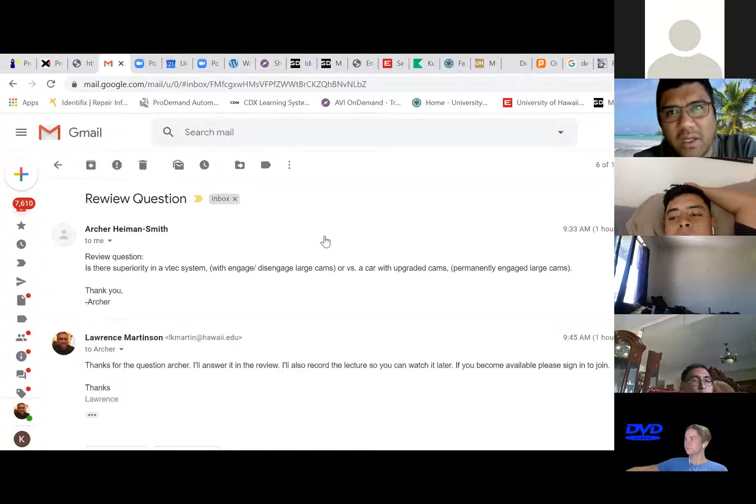So the discussion we can have is: is it better? The only way I could see that it's better is that it still gives you fuel economy. However, if you wanted power all the time to go as fast as possible, I don't think VTEC is the way to go, only because it's got so many moving components. So I hope that answers Archer's question — can you guys think of anything else that I might have missed?

I think the other thing it does at low RPMs is make a smoother engine. So you have the torque and power at high RPM, but you also have a smoother, more fuel efficient engine at low RPM. Because if you have a radical cam permanently in your car, when you're idling it's almost going to sound like it's going to die out if you don't get some RPMs up. Right, so it is a smoother engine. It's about finding the balance between high performance or mid-range performance, since most VTECs don't come stock at the high performance design, while also getting fuel economy, good vacuum, and a smooth running engine.

Okay, Jason, your turn.

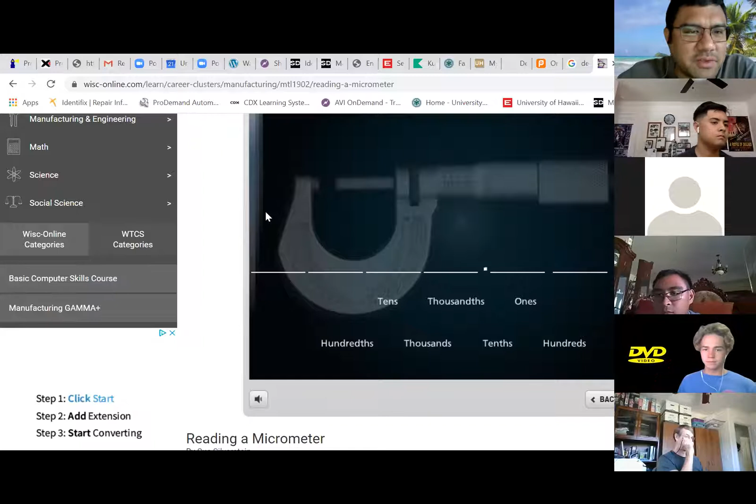Okay, let's drag these out so you guys all have a good understanding of where the places go. So where does tens go? Why don't we start off like this? Jason, I'll go down the list just like I did with the review. Jason, where do the tens go?

The tens? Yep, two places to the... just right above it, right here. Okay, where do thousandths go?

JT? JT? Okay, I'll skip him. Roy, oh JT, where do thousandths go? Space to the right. To the right of the decimal, two spaces, right here, to the right. Yeah, JT said 2 spaces to the right of the decimal point.

Okay, sorry, I couldn't hear. 1, 2, you sure, right here? Yep. It won't let me drop it there, so it's got to be wrong. The next one over, I'm sorry, say that again. All the way to the right? All the way to the right.

Okay, good. Okay Roy, where do ones go? Right by the tens, to the right hand side. Yeah, okay.

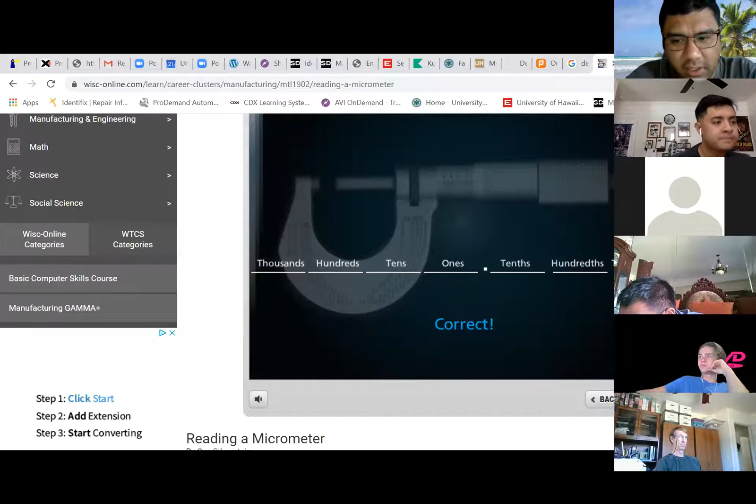Okay, let's move forward. Now that you guys are reading a micrometer, it can be compared to counting money.

So if we look down here at this scale, these whole numbers from 0 to 1, 1 to 2, 2 to 3, those are considered dollars. And in between those whole marks are considered quarters, so 4 quarters make up a dollar. And on the very end here, on the thimble, we have pennies. You guys will see how this lines up in a minute. Just remember: quarters, dollars, pennies. We're going to count that in that order, as if you were counting change.

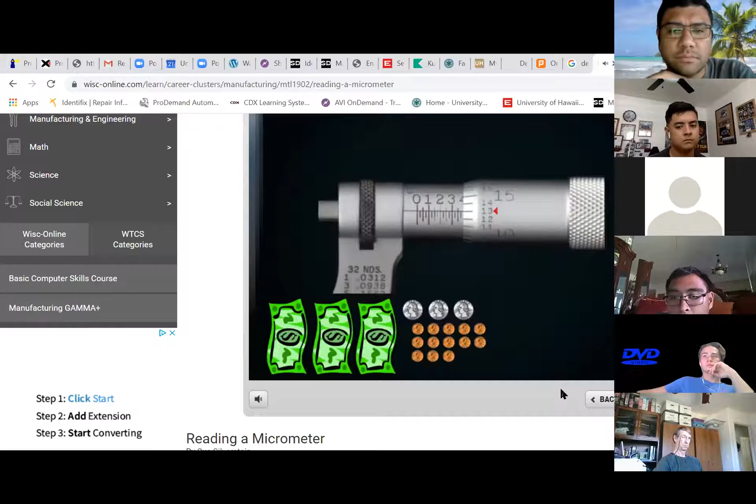When you add all of the coins and cash together, you have a total of $3.88. If you remove the dollar sign and move the decimal point one place to the left, your measurement is 388 thousandths of an inch.

Okay, you guys see the theory going on here? I know we're going to repeat this several times, because if I just stopped here, it most likely won't get burned into your memory the same way as if we repeat this over and over. And there's some other parts of this theory that has to be covered too.

For example, can you see the 4 here? So we have 1, 2, 3, 4. Where can you see that fourth dollar? Well, you can see the fourth number here, but you can't actually see that line, so we cannot count that next dollar up. However, if you were on 0 on the thimble side here, you could count it if it was up to the 4 line.

And really where this is going to come down to is calibrating the tool first. On Electude, the assignments I gave you include a chapter just for engine tooling, and I think it would be important for you guys to go through it. It covers the vernier caliper, the micrometer, bore gauge, and some other tools. I think with that material alone, you guys should come up with some interesting questions.

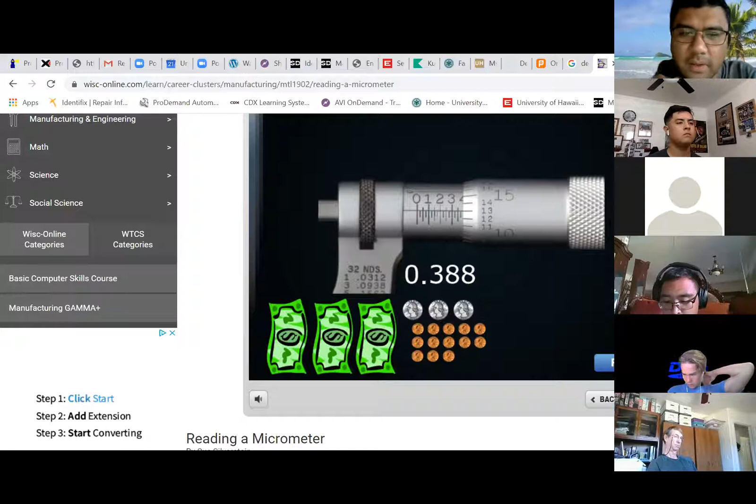That's actually, I think, 3 task sheets that are due for measuring the cylinder. You're going to use the bore gauge, use a micrometer to set up the bore gauge, and then use the bore gauge and take measurements from there. Okay, let's move forward. Now it's your turn. Answer the following 11 questions, look at the micrometer and enter the measurement in the space provided. Give your answer to the thousandth place and include the leading 0. Select the Check Answer button to see if your answer is correct.

Okay, so can anybody tell me what this would be without the dollar sign or adding it up? It's a pretty easy one. Is it 1? No, wouldn't it be 0.100? So how would you say that? A thousand, or 100th, that's 100 thousandths of an inch. So it'd be point... I like to add the 0 in there so there's no mistakes where the decimal point is, so you don't assume the decimal point was in a different place. So 100, and it would be of an inch, but you don't have to put the inch in here.

That's 1/10, right? That's 100 of an inch, thousandths of an inch. I mean, it is 1/10 of an inch also, it's the same thing. Oh okay, it is, you're right. But the thing is, when you say 1/10 of an inch, you're limiting your significant digits, so it's not as precise. Right, that's the best way to answer that.

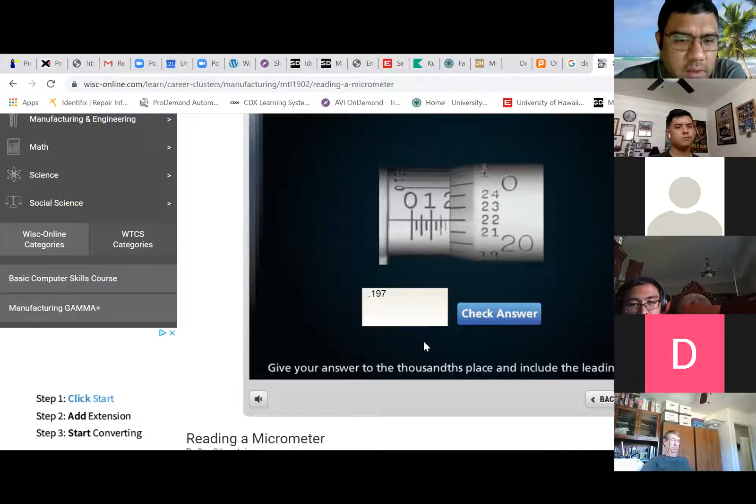How many dollars do we have, guys? 1. How many quarters do we have after the 1? There's 3, right? 1, 2, 3. We don't have a 4th one yet - we can see the number, but we don't have a 4th number here because we haven't reached the 0 on the thimble yet. So we can only count the lines that we see, and we know that's true because the pennies tell us so - it hasn't reached the next 0 yet. So we have 0.75, and then we have 22 pennies. So we add that up, it's 1.97 - then we would move the decimal place over 1, and it would become 0.197. So how would we say that? 197 thousandths, good, 197 thousandths of an inch.

Now what do we see? How many dollars do we have? 2. 2.00. 1 quarter, so that's 25 cents, 15 pennies, 0.15. We add that up, we get 240. Move the decimal point over 1, so we have 240 thousandths of an inch.

I'll tell you guys a secret. If you were to go to a machining school, they wouldn't teach you this method. You'd have to remember it a different way. I'm not sure how Schulte teaches this, but this is the easiest way I've learned to remember and teach it. If you do it this way every time, you'll make almost a minimal amount of mistakes, which is very important when we're talking about ordering parts or having a machinist take down metal.

Especially when we're doing 100 measurements, you know what I mean? Like if you have a page for each piston or each cylinder, we're doing like 6 or 9 measurements for each cylinder. You multiply that times 8, that's 72 measurements to come up with your different measurements of bore, out-round, and taper. You guys understand what I'm saying? So if you're doing repeat measurements like this, you'd want to find the easiest method, and this is what I found.

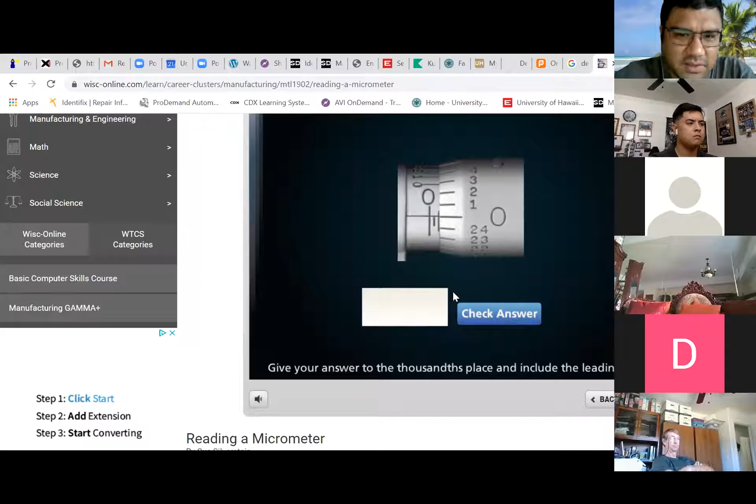How many dollars do we have? 0. How many quarters do we have? 2. We're on the 0 line, so we can count that as 50. So how would we say this? 50 thousandths, right?

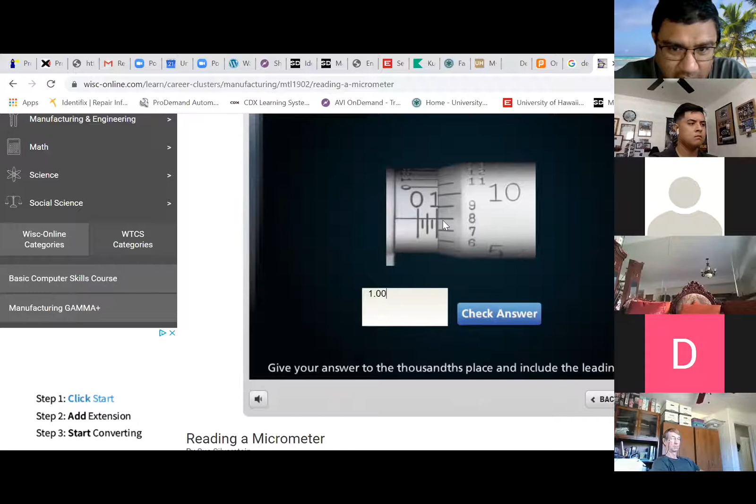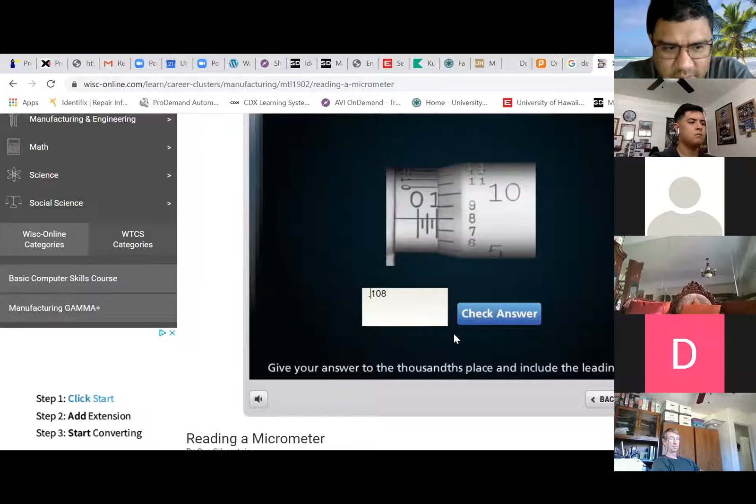We got a couple more to do. Okay Chrisanne, how about you? How many dollars do you see? There's 1, so do 1.00. How many quarters do you see? None, but we are past the solid line by 8 pennies. So if we add this together, we end up with 1.08. Move the decimal over - how would you say that? 108 thousandths. Good, 108 thousandths of an inch.

I don't know, is this a tricky one? JT, are you there? That's 17 cents.

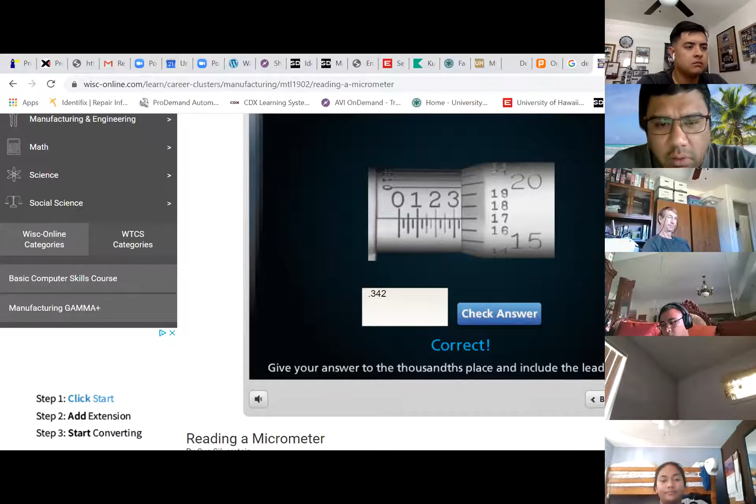Okay. The next video, the next part I want to share with you guys is that video, and that is how to use a bore gauge.

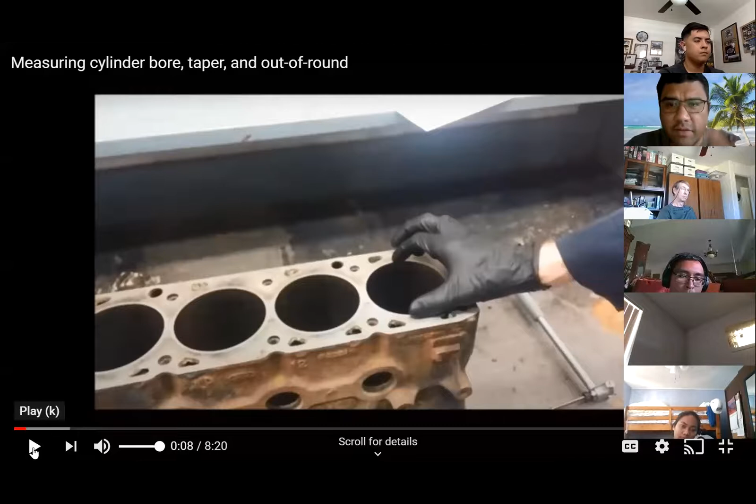And when we measure it, we're measuring it for 3 things: for its bore size, for its taper, so whether it's wider at the bottom or the top, and for its out of round, whether it is perfectly round or whether it's oval shaped. And we're going to do that with a dial bore gauge.

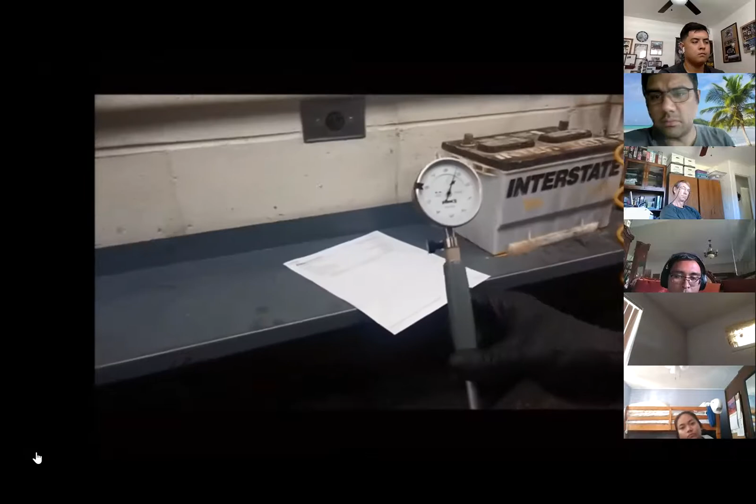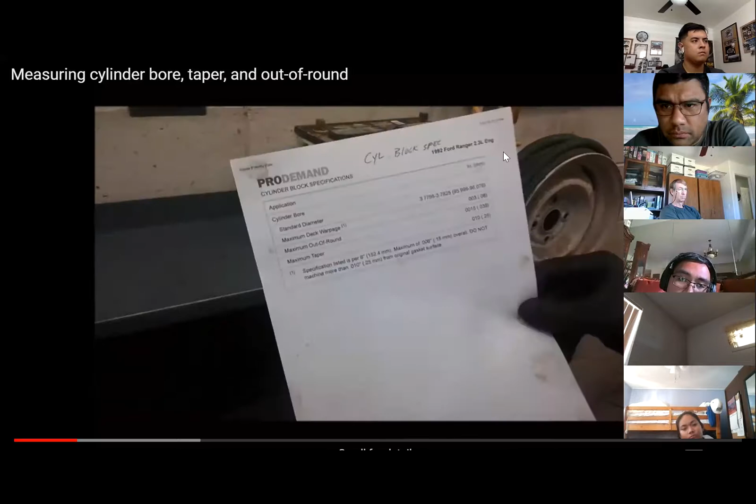Of course, a dial bore gauge can't measure anything by itself, and so we're going to use a micrometer to set this at 0. So we found the specification: the standard diameter for the cylinder bore is 3.7795 inches. It gives us a range, but we're going to set it at the lower number, so I'm going to set the micrometer at 3.7795. We've got it set already and locked. Then we'll take this to a vise. I put a rag in the vise and I set this inside of here just lightly, and then I very lightly tighten that down. Don't tighten it very much or you'll distort this.

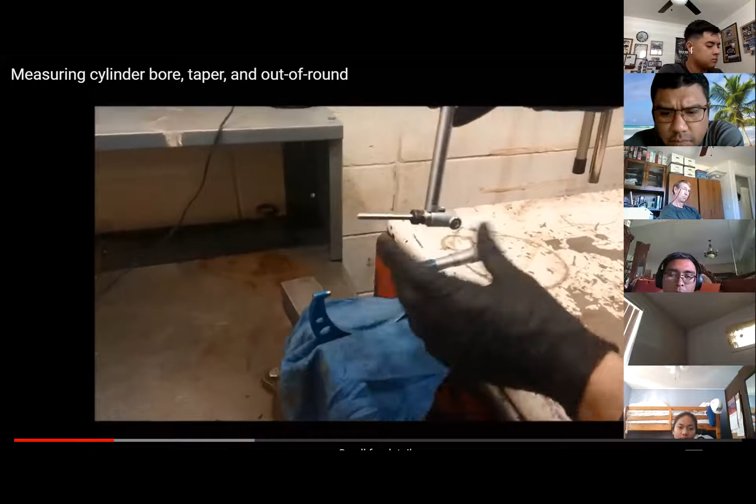Then we find the appropriate attachments for this dial bore gauge. Okay, good, it paused.

Micrometers are very sensitive tools. Before you even start to measure anything with this, they have to be calibrated. So in the box of micrometers, there is a calibrating rod, and there's going to be a calibrating rod for each micrometer frame size. So for the 0 to 1, it's going to go 1 inch basically, and you're going to calibrate it by tightening up the thimble area to 1 inch, and then it's going to say 000 across the range. If it doesn't, there are these little hook tools that are inside of the box of micrometers, and you would actually turn the side down here. There's a sleeve that actually can spin, and you would actually turn it to line up the zeros with each other before you even do any measurements.

So he kind of skipped through that in this video, which is okay, but you want to make sure that the last person who used the tool, especially because the school's tools are shared, right, everybody's not as careful with them. So you want to make sure that that tool is calibrated for what you are intending it to be measuring to. Otherwise, your whole set of measurements could be off. Does that make sense to everybody?

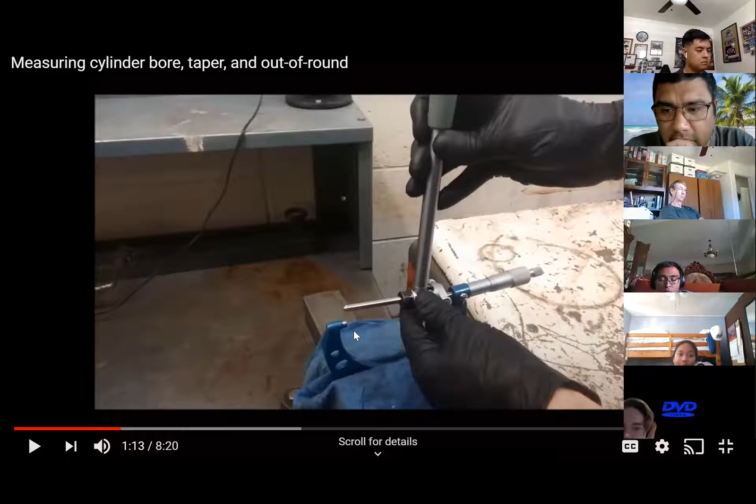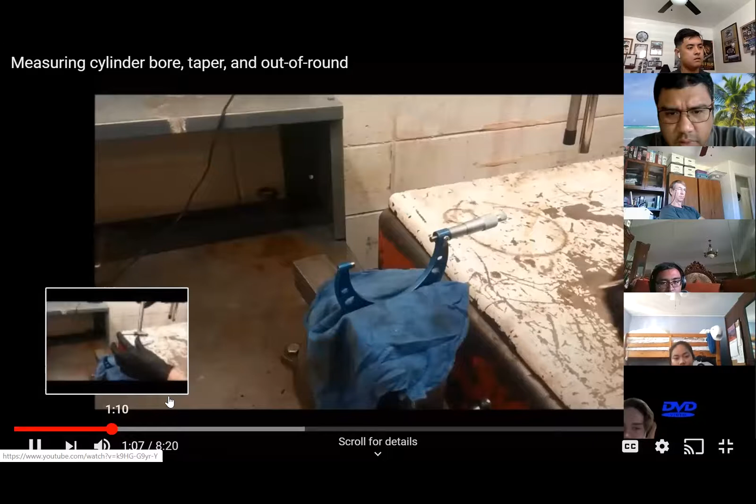We've already done that. So the attachment he's talking about is this rod - can you guys see my mouse traveling here? There are different length rods that you would have to screw into the actual bore gauge. There's a tightening nut right here, and this rod that goes in, there's different length rods. They might start off at 1 inch and go up to like 5 inches, depending on what size you were trying to measure of your bore.

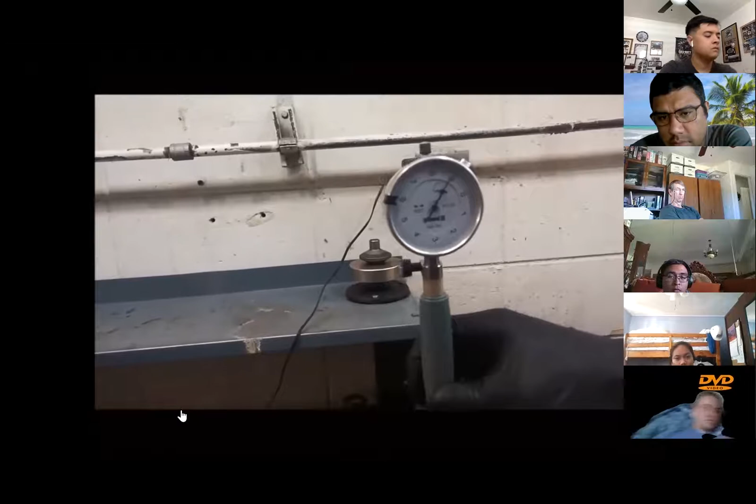And we put it in here in between the micrometer, and then I'm going to rock this back and forth, and when we see that dial, or that needle, change directions - this is probably the trickiest part of this whole operation, is getting this set to 0.

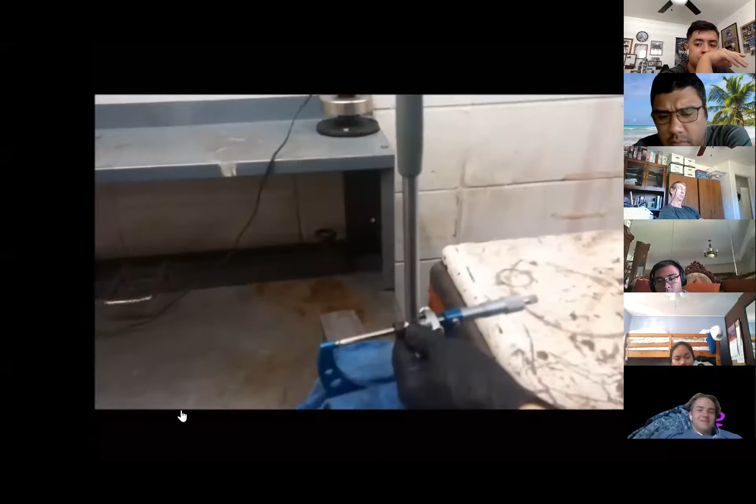It's close already. I'm holding the back and rocking it. You'll notice that needle's turning around. Let's see, where's it at? It's really close to 0. Let's turn just a little bit more. Okay, I think we're there. The needle's turning around right at the 0. So I'll carefully pull it out.

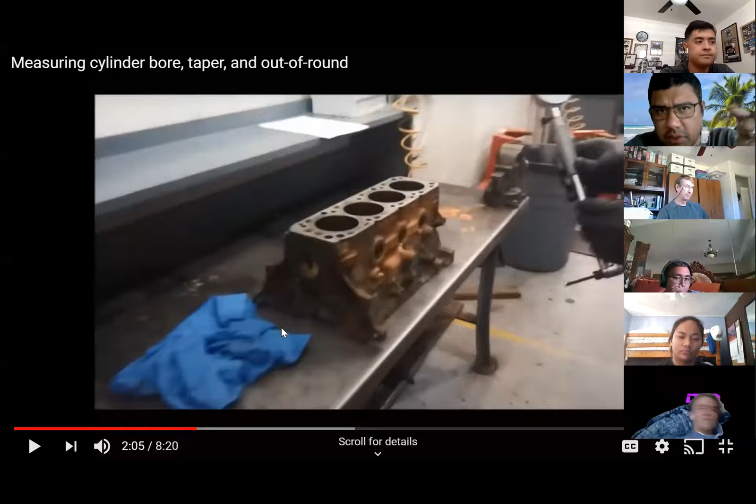So what he didn't show you was when the needle started to reverse its motion, he actually moved the face of the bore gauge to 0 on that line. So you can turn the face so that the 0 line lined up with where it started to reverse backwards. I sent everybody this video because I want you to watch it as many times as you need to understand what he's saying.

I've been using this video for the last couple of years because you can see it as many times as you need to, since we only have a couple bore gauges. By the time you get in a group and want to take your measurements, not everybody really understands how the tool works, so please watch this video. When we get back in the shop, we can actually use the tool.

But I'm going to back this up again so you guys can see what he's doing. You'll see the needle start to go one direction and then bounce backwards, which means either the cylinder you're measuring gets bigger - because if the number got smaller, that means the cylinder was actually tapered in or narrowed in that section. So watch.

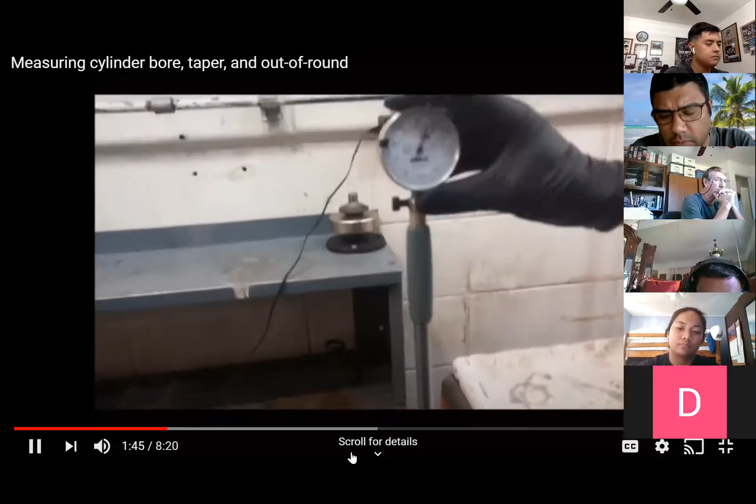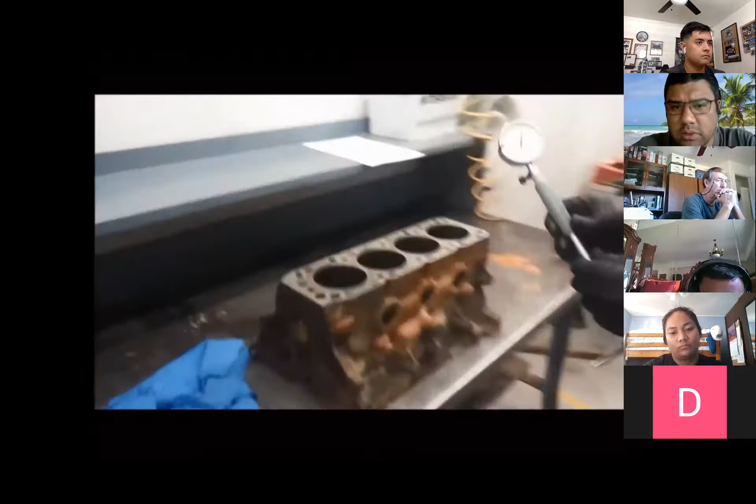And we'll come over here to the engine block. We'll start with cylinder number 1. What I'm going to do is make myself a chart - we're going to measure each cylinder in 6 different places, 3 at the top and 3 at the bottom. So I'll make a chart like this.

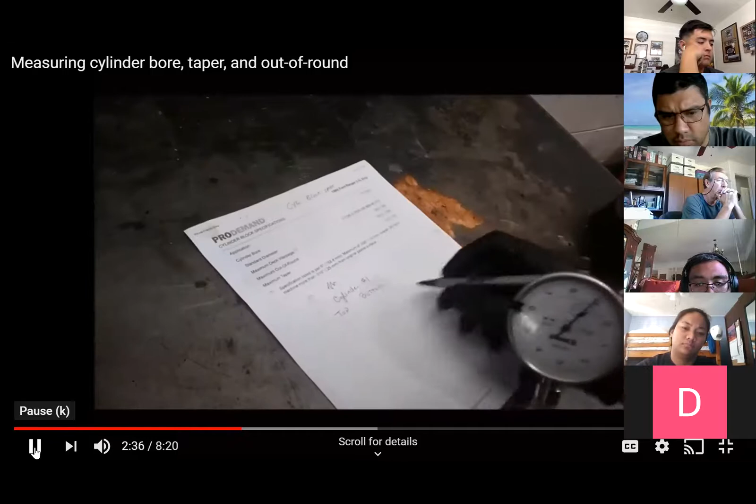Kind of works. Cylinder number 1, top, bottom. And then I'm going to say position 1, position 2, and position 3.

Now I'm going to take my measurements. I'm always going to use position 1 as it's perpendicular to the engine block - this is the direction that the piston would rock back and forth. Do you guys remember what that location of the piston would be called as it's moving up and down in the cylinder? This perpendicular spot he's talking about, what's that called?

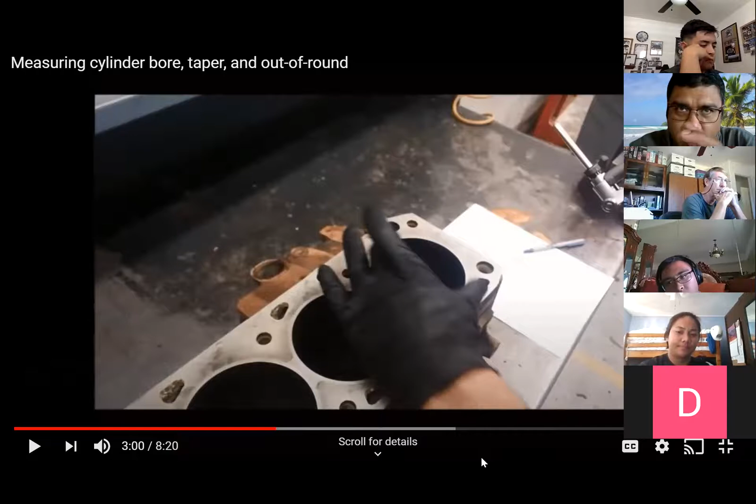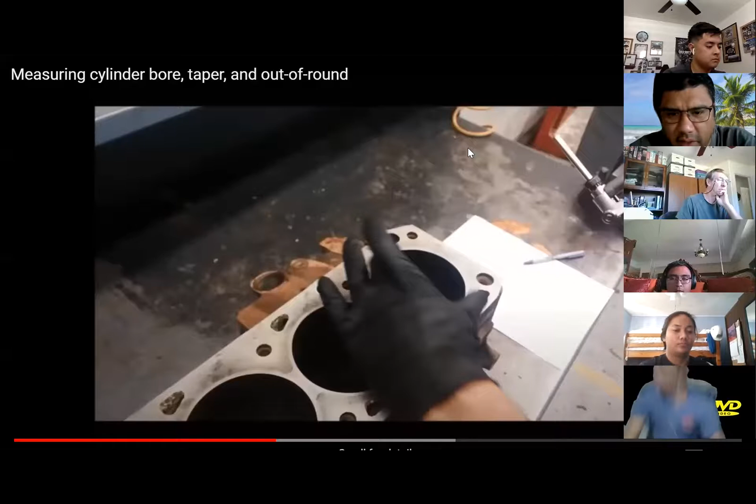What is that - that type of wear pattern for that motion? Somebody's chatting in: thrust side, good JT, good. So we have our major thrust side and our minor thrust side, and it's actually in this next chapter where it talks about that. This is where the most wear would occur if there is wear in the cylinder.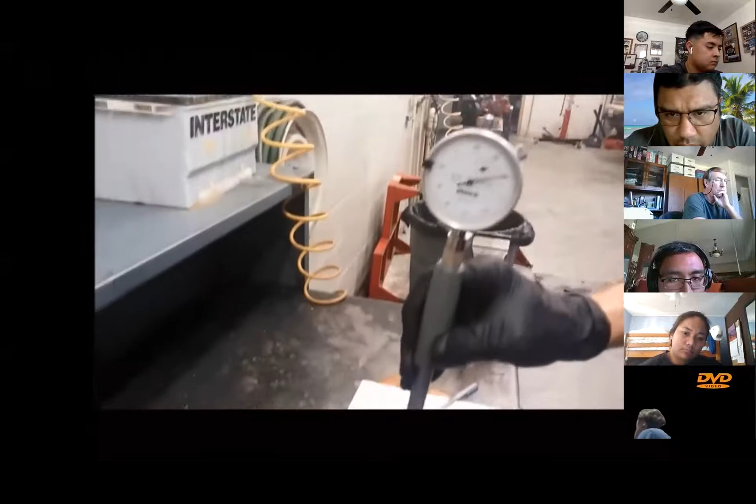So I'll call this position 1, and I'll go down just below the ring ridge here, just down about half an inch or three-quarters of an inch into the cylinder. And I'm going to rock this and watch that needle go round and round, and it stops right there.

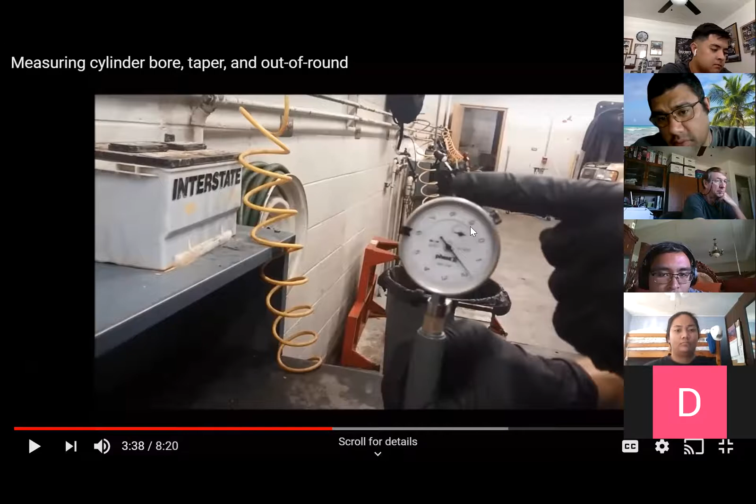On this dial, each little tick mark is a 10,000th of an inch, and the large numbers represent 1,000ths. So this is actually just slightly more than 2,000ths of an inch larger than the specification we set the micrometer to. Can you guys understand what he's saying? So even though it's not lined up with 1 or 2, you can count it from 0 being this way - 1, 2, even so going to 9 to 8. Yeah, in fact, to be specific, it's...

Can you see why he's saying it stops? It's because the needle reverses positions. It starts to spin one way, and then at the point where he is perpendicular, straight up and down in that cylinder, the needle actually reverses positions, and then he goes forward again.

To get the exact measurement of where it's at, because it's calibrated for that cylinder's bore size, he set his micrometer to the size it should be, then he set his bore gauge up to the micrometer. Now he stuck the bore gauge in the cylinder, and he's looking for the position where the bore gauge is completely straight, where the needle starts to reverse. Now he's actually going to take the measurement of the cylinder with the bore gauge. It's a much quicker and more accurate way of measuring the cylinder.

Like I said, when you use a telescopic gauge, you can't tell exactly where the telescopic gauge is straight up and down on the cylinder.

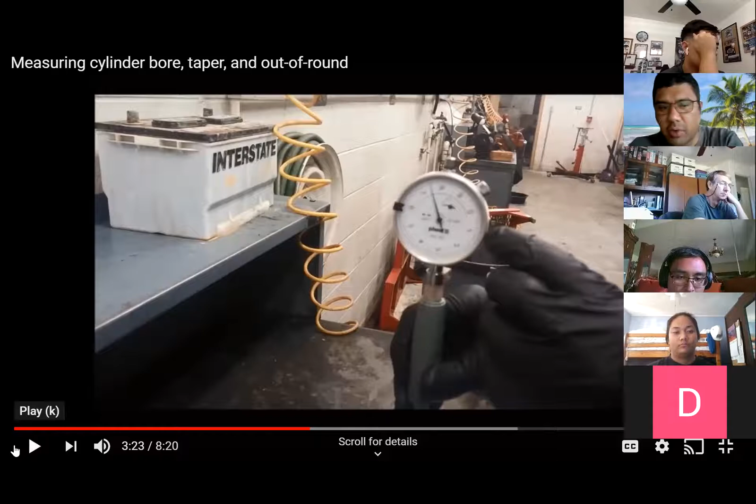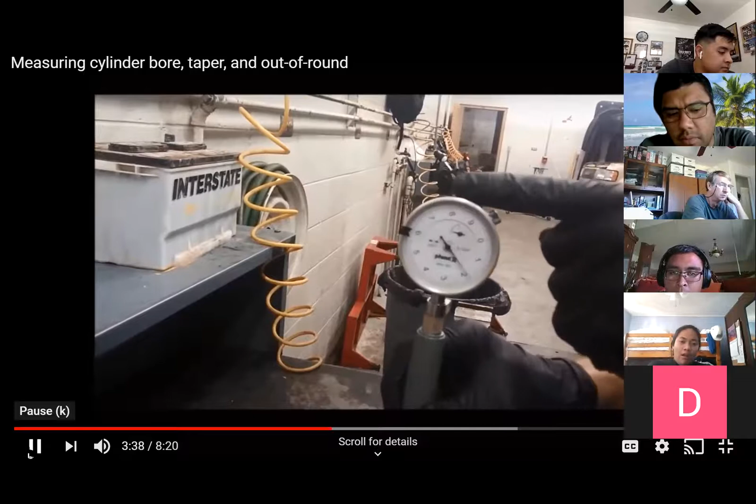Okay, so we're at the point where he's making sure that it's straight up and down, and then he's going to start taking the measurement. On this dial, each little tick mark is a 10,000th of an inch, and the large numbers represent 1,000ths. So this is actually just slightly more than 2 thousandths of an inch larger than the specification we set the micrometer to. In fact, if it was smaller than the specification, which side of the 0 would the needle be?

Goes out of spec. If the taper—and very rarely is this the case—but let's say especially on the top here, the thrust side of the cylinder, we'll say that this needle was on the right side of 0. I don't want to say positive or negative because that might confuse you, but if this needle, when he set it to the perpendicular point, was on the right side of the 0, what would that mean? Let's go backwards. What did 0 account for here? When he set up the tool, what was 0? What did that mean?

And what do you think, Christine? Do you remember? Remember he was moving the dial, and the 0 meant that there was a meaning for that 0. Let's see, somebody's chatting.

Right, JT. So it's where it's straight. The perpendicular point, the perfect right angle to the tool, meant that the tool was completely straight in its bore. So the 0 point meant that it was straight in its bore. When it goes to the left of the 0, it means that it's larger than what the spec was, right? And if it was to the right of the 0, it would mean that it's smaller. Does that make sense? Okay.

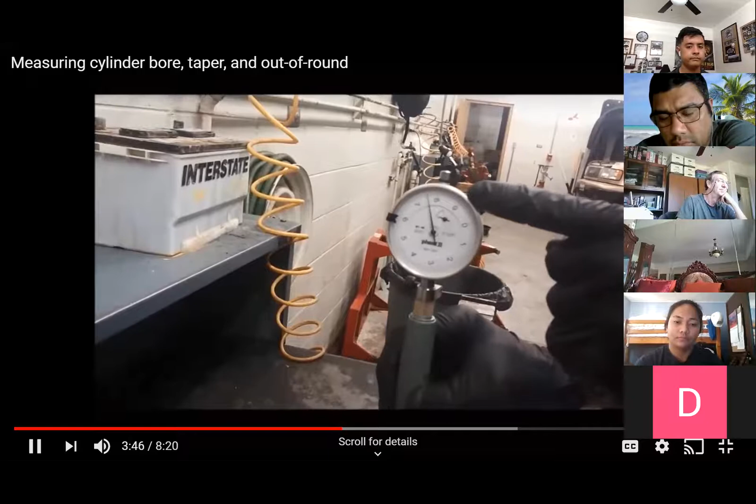Back to being specific, it's 2.4 thousandths of an inch. So I come here to position 1, I'd write 0.0024. You guys see why it's so important to understand the placement of your decimal points, also where you're measuring? That's why I went over that exercise, because when we start measuring below the thousandths mark, you can make mistakes there easily.

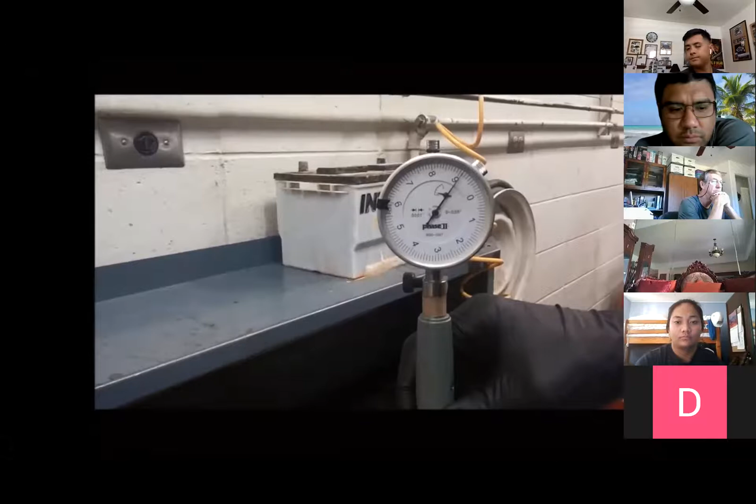He's at 0.0024, so 2 thousandths and 4 tenths of a thousandth. Now position 2 I'm going to do here, and then position 3 like this, so that we're just slicing the cylinder into equal slices. So position 2, there, it's about exactly 1 thousandth of an inch. So what's he looking for at this point? Before he took the measurement of the thousandth, because each one of these is a thousandth, each line is a thousandth, or each whole number is a thousandth, and each one below that is a tenth of a thousandth.

So what is he rocking the tool for? Play, for play? We just talked about this a minute ago. What is he doing when he's moving that tool back and forth?

Yes, see how the needle's bouncing back and forth? What is he looking for? Not yet, not where—JT is not looking for where yet. They haven't seen his stuff yet. That point where the needle's bouncing left and right, left and right—what does that identify? That it's not straight.

Taper—not yet, he didn't take that. He's not looking for that number yet. He's looking for where the tool is straight up and down in the cylinder. Because when he slides the tool down, if it was a little bit to the left or to the right, what you're trying to do is find where the tool is straight up and down, so that we know the measurement we're taking is accurate.

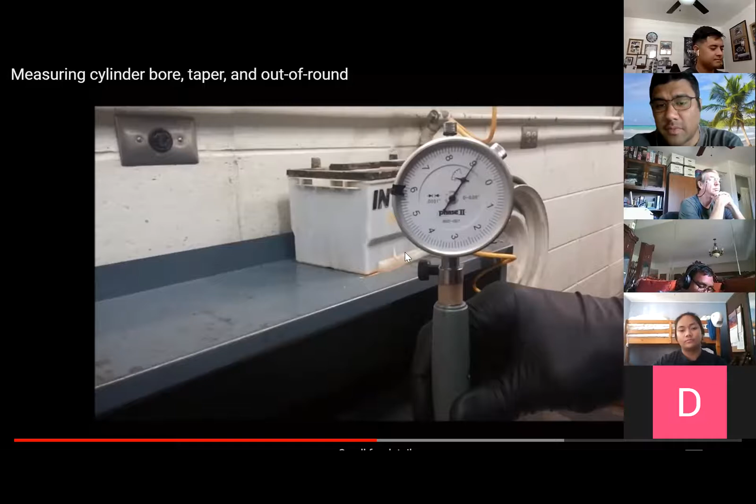Okay, then once he reaches that point, he's going to take a measurement, which he already said is about 1,000th of an inch bigger than the specifications, right? There—it's about exactly 1,000th of an inch.

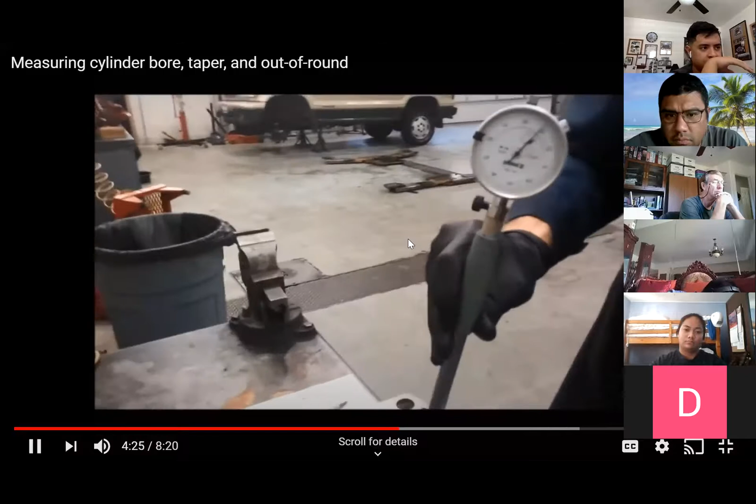And position 3 will be like this. And right there, it changes direction, so it looks like it's right on the 1,000th of an inch mark again. So what these represent is how much larger than the specification the cylinder is here, at the top of the cylinder. So we're going to take a measurement at the top, and we're going to take a measurement at the bottom, to show how much bigger it is, or whether it's tapered.

Because after an engine has been used for a given amount of time, what do you think happens inside the cylinder? When the cylinder is brand new, it's a perfect cylindrical shape at the bottom and at the top. But what happens when the engine runs, say for 10 or 15 years of hard use? What happens to the cylinder, especially with the thrust of the piston? It gets worn, right? I heard somebody say that.

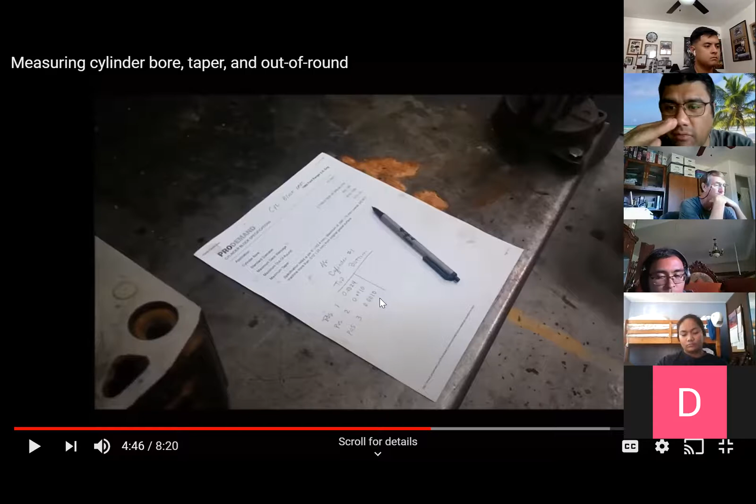Okay, so when it wears out, what happens to the material in the cylinder? It starts shaving off metal—we're basically shaving off metal. So at a certain point, it becomes too out of round, and if we cannot machine that out of round out of the cylinder, we either go to a larger bore size, which means we have to get larger pistons and larger rings to match the bore from the machinist boring out that block.

Okay, this is exactly how I want you guys to make your charts when we start measuring the engine. You're going to make a cylinder 1, cylinder 2, cylinder 3, and cylinder 4. Everybody has a 4-cylinder engine because I wanted to keep everything simple, so everybody does their own cylinder measurements. That way you guys all get your own experience with the measuring tools and that particular task.

Okay, so let's watch the next part. He's going to go to the bottom. Now that he has position 1, 2, and 3 for the top, he's going to do position 1, 2, and 3 for the bottom.

So I'll do the same thing at the bottom of the cylinder—position 1 at the bottom. Looks like it's about 18 10,000ths, or 1.8 thousandths. Try it one more time. Or 19, depending on where I move it to—there's a little bit of variation.

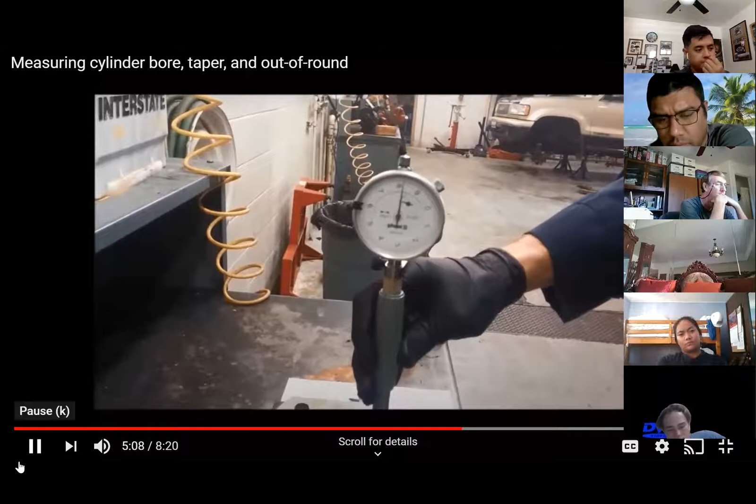Okay, so you guys saw what he did—he went a little bit further. It rotated down to the lower side of 3; in between it's like 3.5 thousandths. You guys got to use some common sense here and look at the tool when you're using it. We're looking for the perpendicular point of the tool being straight up and down, right? If you start to move the tool and it goes to the opposite end and starts rocking, but you look at the tool and it's cocked to like 10 o'clock or 2 o'clock, there's obviously something wrong with where you're trying to calibrate to zero.

Okay, so it's going to take some time and practice using the tool. But once you start using it, it'll become apparent, especially when you're trying to calibrate it to zero. So we'll say 18.

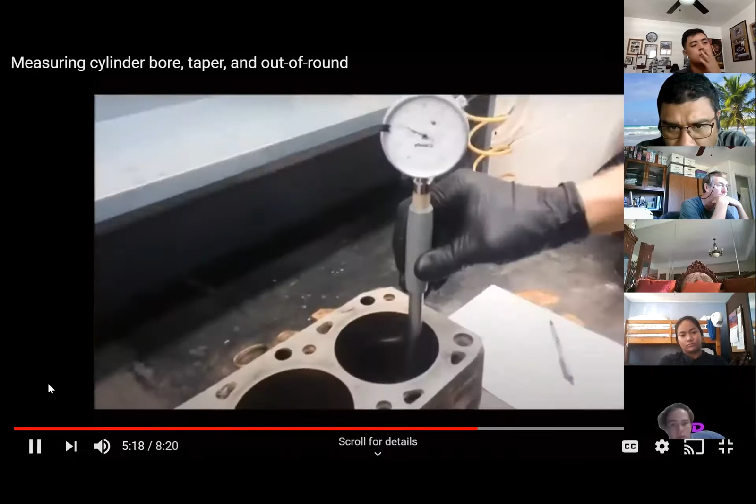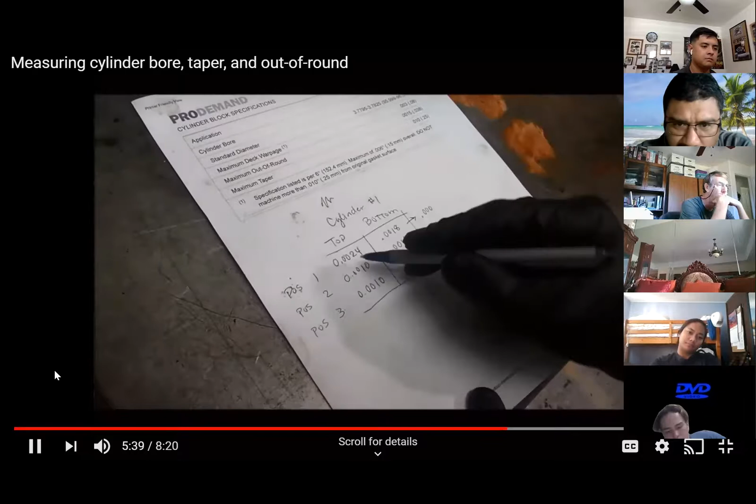Okay, now once we have these numbers, here's where we can calculate our taper and out of round. So if I look at position 1, top and bottom, I'm going to come over here and find the difference between those two numbers. And it's 0.0006, 6 10,000ths of an inch.

I'll do that all the way through here. In this case, there was 0.0001. And here, it's 0.0008. The largest of these three numbers is this one.

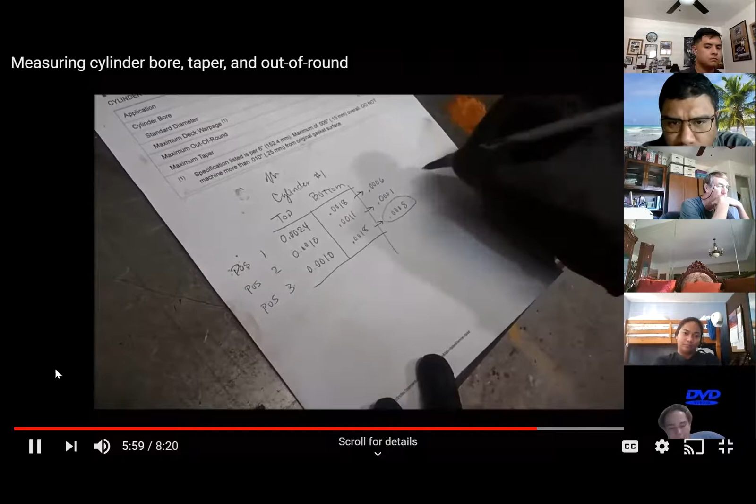So I'm going to call that my taper. The most taper that I found here was 8 10,000ths of an inch difference between the top and the bottom of the cylinder. Now to find my out of round, I'm going to compare these to each other.

What's the difference between the largest and the smallest number? It looks like it's 0.0014. And here, 0.0007. It's the difference between the largest and smallest measurements we took. The larger of these two numbers, obviously, is this one. So that's my out of round.

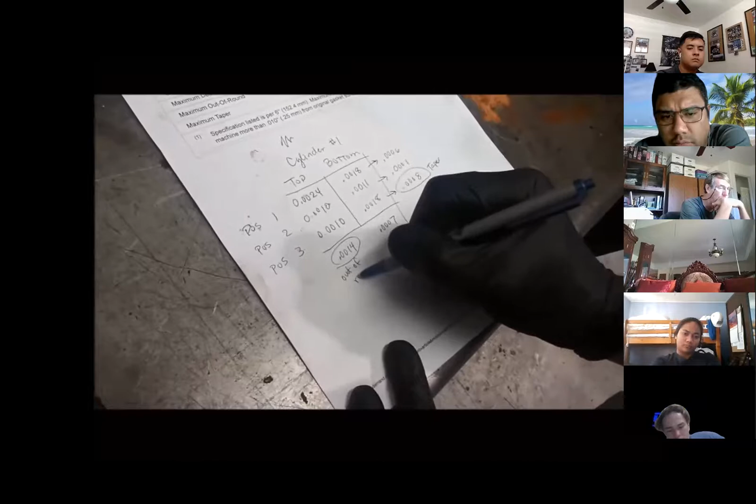Then you would stop at this point and look at your specs that you guys all have on your computer or printed out. I don't know if you want to do it this way, but you could make an Excel spreadsheet with all these measurements, or you could write it down. It's up to you, but you're going to have to submit these measurements to me in a task sheet.

If you were creative and put it in an Excel spreadsheet, you could just copy the file and not have to type anything into the chart. You could just send me a chart that way. You're going to have to do it for each cylinder, so identifying which cylinder you were working on would help. If you were in a group, you could do it as long as you label it like cylinder 1, Jason's, or cylinder 2, Shane's, something like that.

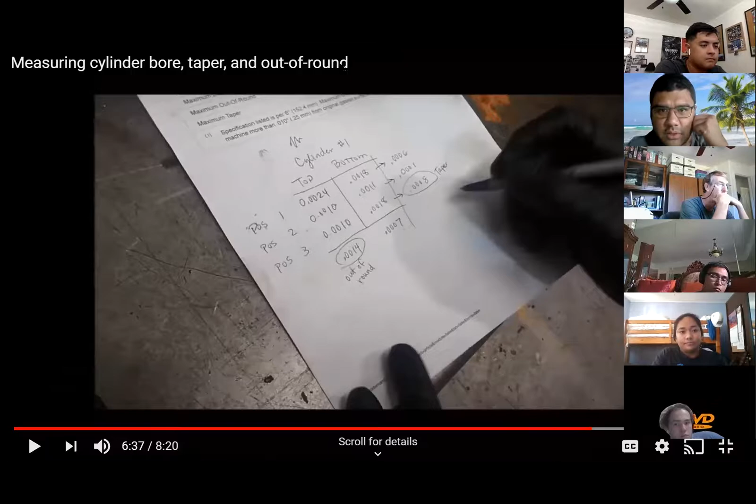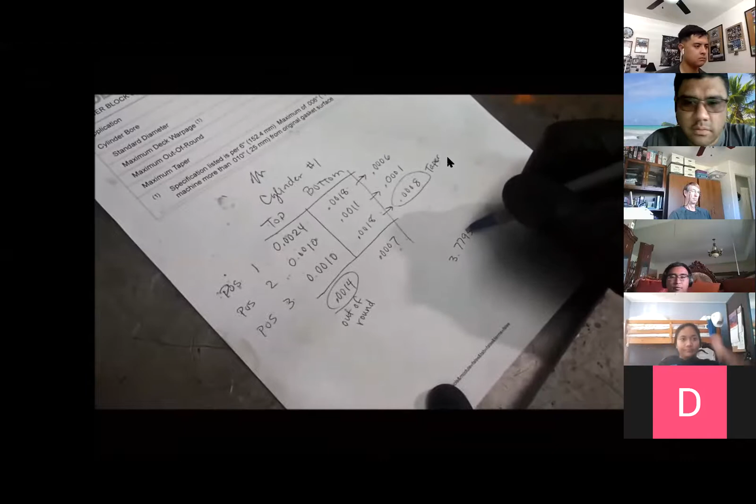Now you'll say, what was your exact bore measurement? So I'll come back to my specification here. 3.7795 was my specification, and I find the largest number that I measured, which was this one, and I add 0.0024 to that.

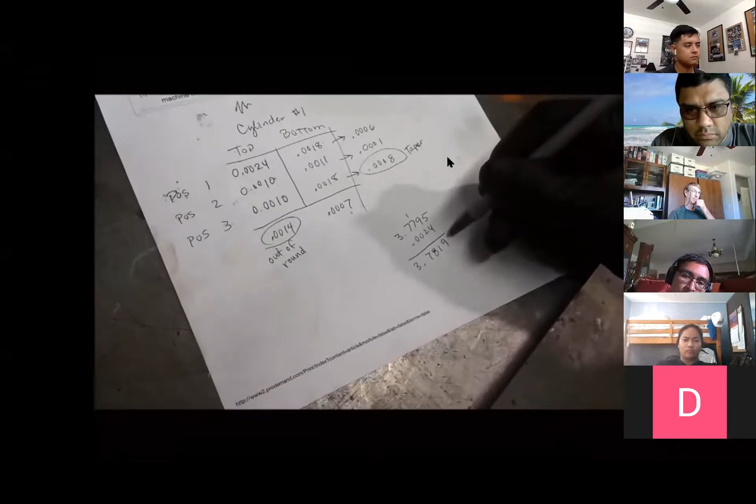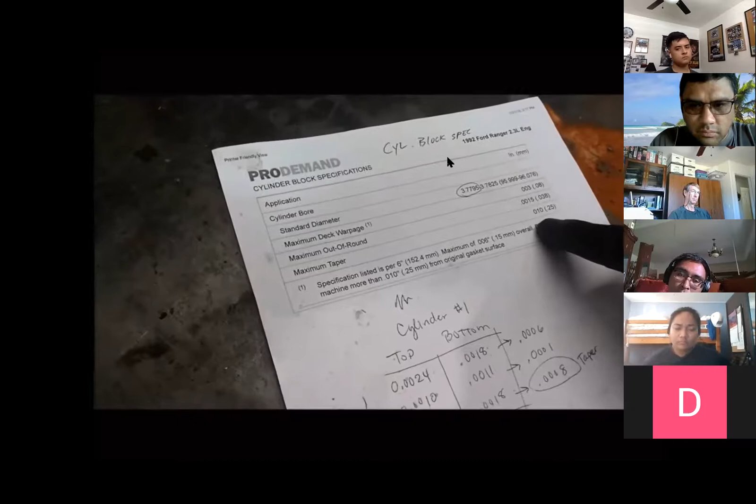So my bore measurement, the largest measurement in that bore, was 3.7819 inches. Now that I've taken all of the measurements, I can compare those against my specifications and find out if I need to do anything with my cylinder, if it needs to be bored out, or if it's okay to use, as long as everything falls within that specification. I've also got specifications for out of round and for taper. As long as these numbers fall within those specifications, I can reuse the cylinders like they are. I can just hone them and reuse them. Otherwise, they have to be bored out.

One thing to be aware of: as you take this measurement, if it's to the right of the zero, it's actually smaller than the specification. So in this case, it's to the right of the zero, it's smaller than the specification we set the micrometer to. That doesn't happen often, cylinders don't get smaller, but for some reason, either our specification is wrong or the cylinder is distorted, this is showing us it's 3 thousandths smaller.

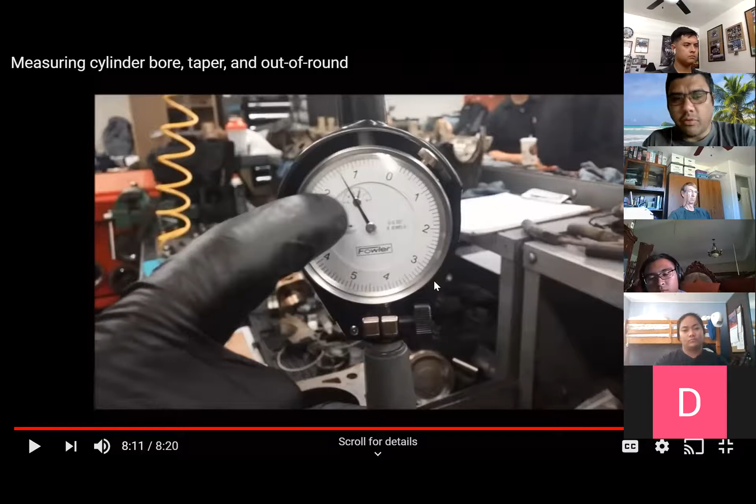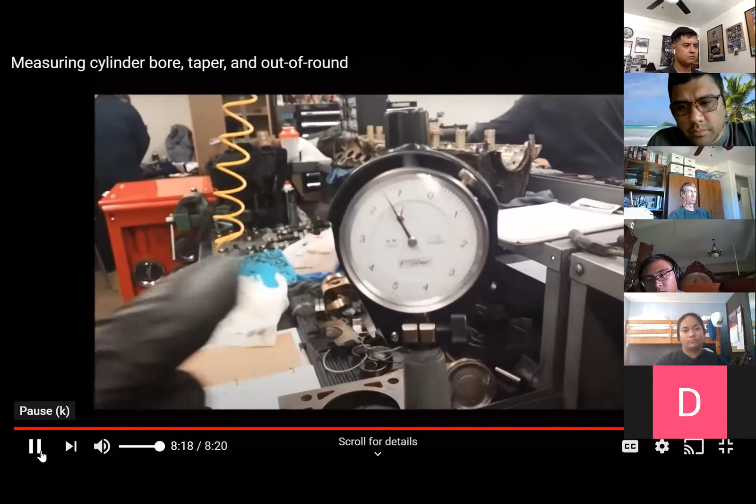On the other hand, if it goes the other way - remember I was talking about this earlier - if you go to the left, it's larger, meaning your cylinder measurement is larger. If you go to the right of the zero, where you calibrated to the exact number your cylinder is supposed to be, it would go smaller. So if we're measuring taper, that's when we'd see it go smaller than maybe our wear measurement. Over here on the left of the zero, that tells us it's larger than the specification, and that's most typical. It's very rare you're going to see it's smaller, because how are we going to add material into the cylinder? Weld on top of it.

Okay, does that make sense to everybody? And we will go over this again in class before we actually do the measurement.

But if you could watch it a few times, pause it, back it up to see what he's doing, it would be really important, it'll help you guys understand how the tool works. Before this, I would show it in class and have everybody stand around me and demo it, or demo it for a group. However, I felt like students really weren't understanding how the tool worked because they were watching but weren't necessarily able to watch that action over and over again. So I think if you could watch that video several times and understand what he's doing, and if you have questions about the video, you can always email me or message me, or we can bring it up in a review. It will help a lot.

What time do we start? It's 10 o'clock. You know what, before I let you guys go, let's go into some of these slides for today, okay? Is that okay with you guys? Yeah, okay.

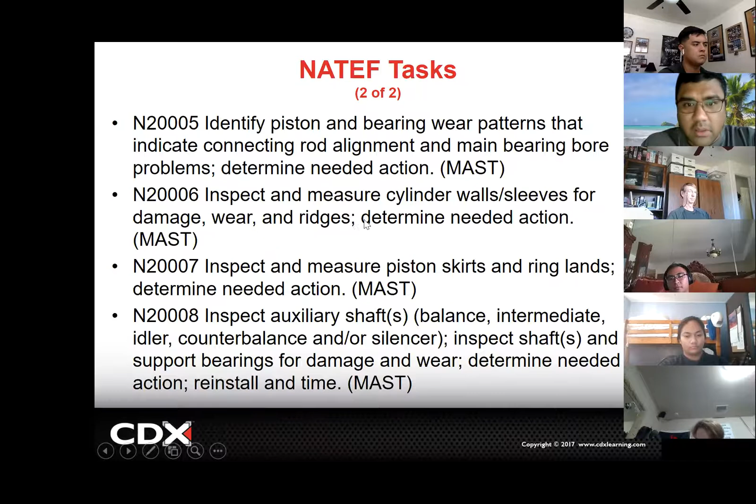So that's all the task sheets for this chapter. Then it goes into the knowledge objectives, what you guys will learn, and then the skill objectives you guys will learn. We've already covered the major parts of the engine block several times, but let's go over this again.

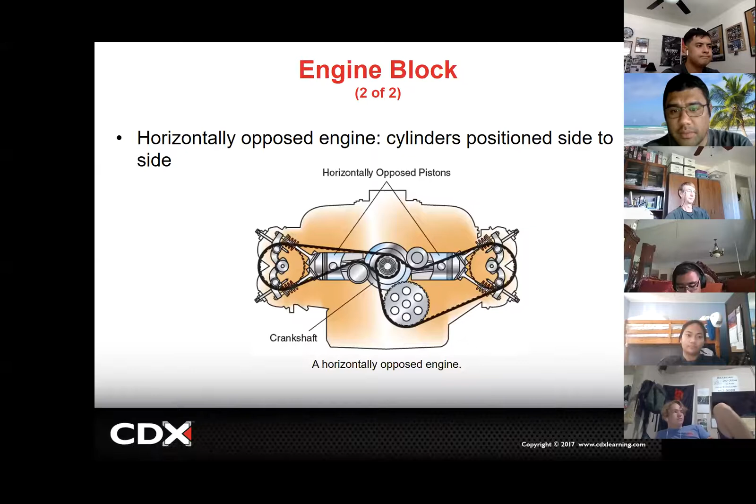So I think we had a discussion about this early on when we were talking about freeze plugs. Kevin might have mentioned that when they produce the engine, they form holes for casting, for pouring out the sand in the water jacket areas for the freeze plugs. Engine blocks have voids in them for the water jackets and cylinders, using gravity for molten metal pouring. They pour out of those holes when casting the engine, and then core plugs are used to seal those holes. They're either called Welch plugs or soft plugs.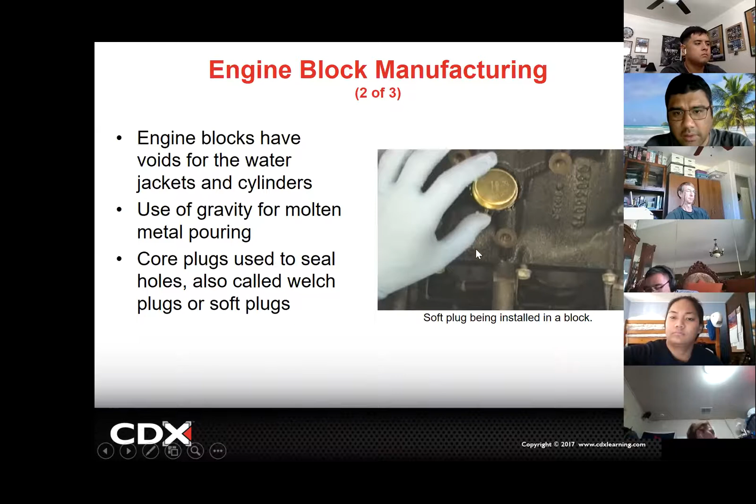I actually used to work at Napa, and they sold expanding rubber plugs. So in case you were stuck with a rotten or bad freeze plug, you could screw a rubber plug in, and it expands to temporarily seal that. I believe that's what the Welch plug is. But you'll also encounter installing brass freeze plugs, because a lot of the freeze plugs that come from the manufacturer are steel.

Any questions? Okay, so this next part is showing the location of the oil pump, which is on the front of the engine, being driven by the crankshaft. This part is the crankshaft, and it drives the oil pump.

Some of the components of the engine block assembly include the ribs, webs, or fillets, which are used to provide rigidity to the casting. You guys see here this webbing type of material they add into the casting in the crankcase. It's there for support and to strengthen the engine block.

I've also seen, like some of you watch engine builds for Hondas, some of the very small Honda or Toyota 4-cylinder engines were never designed for the amount of torque people are building them to create. So if you're looking at a 4-cylinder engine, besides the cradle underneath for the main bearings, they actually put 2 plates on the sides of the engine to prevent the engine block from twisting and cracking.

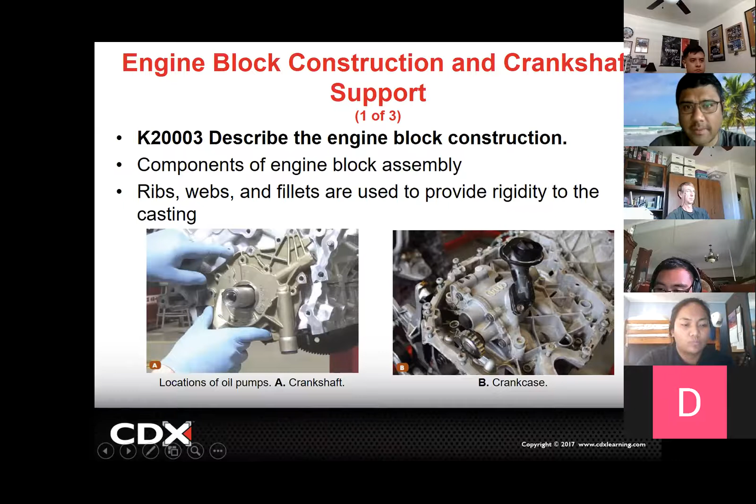Here's another design of ribs, webs, and fillets to support the engine block itself. And then there's the main bearing cap showing the crankshaft. So this is if you didn't have that cradle - the main bearings, when supported by a cradle, would have main bearing caps like this.

So this is a 2-bolt main bearing cap. You might hear sometimes where we're talking about 2-bolt or 4-bolt main engines, and that's what they're talking about - how many bolts support this main cap to the engine block.

So here's that word, the girdle. A girdle also helps position the main bearings in the engine block assembly. It also supplies the engine block rigidity and structure and prevents lateral or vertical movement.

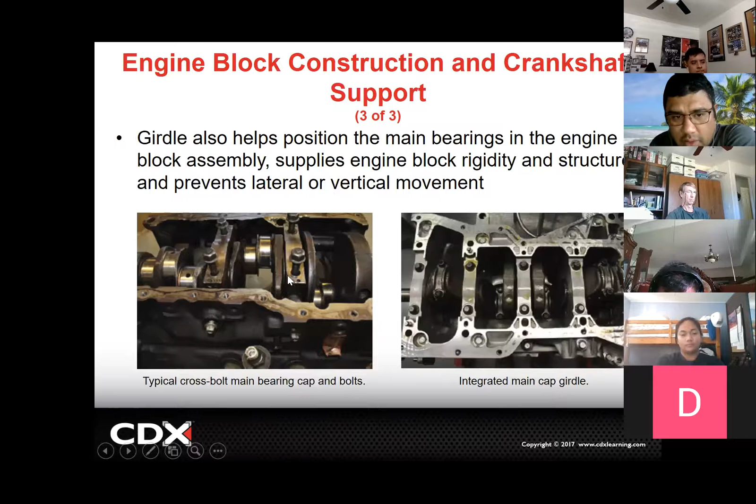We haven't covered this chapter, right? No, this is the first time. Okay, good, I'm just checking. But we have covered a lot of the material that's in this chapter, so that's why I'm working quickly through it. If there's something you need me to stop at, just tell me.

Let's see, let me get you guys involved - what's the oil pan for? Holding oil, right? It also seals off the bottom of the crankcase, but its main job is to hold the amount of oil needed to properly lubricate the engine. It also helps radiate heat out of the engine, and helps reinforce the engine block too. So it has different jobs besides just holding oil.

Here's our cylinders. Our cylinders are the large holes in the block in which the pistons move up and down. You guys know this too. They can be machined directly into the cylinder blocks, or they can have sleeves like this.

This is a cast iron block. It's got the water jacket on the outside. It looks like probably a Honda. You guys see the difference here? So the water jackets in A, they still surround the cylinder, but they don't make a complete circle around the cylinder. This actually has a little bit more strength than this block here.

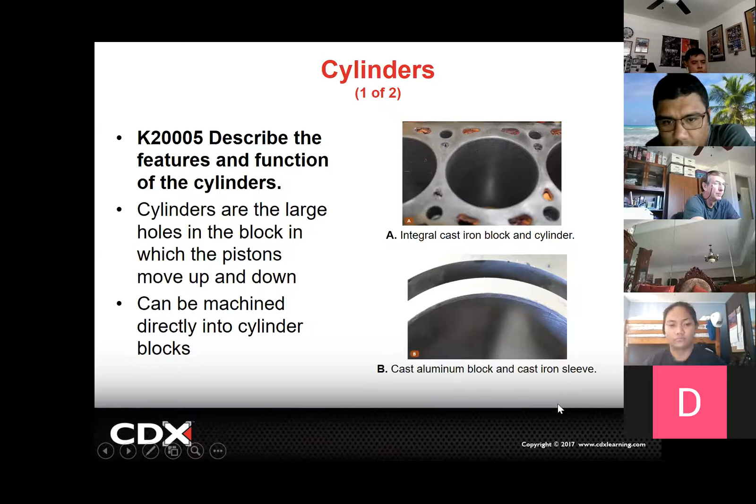What they didn't explain was, because it's different material, how do they account for expansion rates of the different materials?

You know what? Let me write this down. I don't know, nobody's ever asked me that question, Kevin. Yeah, because when you put a steel sleeve in an aluminum block, you're going to get different expansion rates. Yes, the aluminum is going to expand way more than the steel, right? So are you asking what prevents it from cracking? Well, yeah, how is it that it doesn't crack the block?

Okay, I'll look that up. I don't know the answer to that. It's a good question. I do know, like I was explaining earlier, that most of the engines that have a sleeve like this are designed for heavy duty purposes, so maybe they don't have aluminum blocks. But I will look into the engines that do have an aluminum block, and if they are sleeved, how they account for that expansion rate. But I'll be honest, I don't know the answer to that right now, but I'll find it out. Is that okay? Is that fair, Kevin? Yeah, sure, okay.

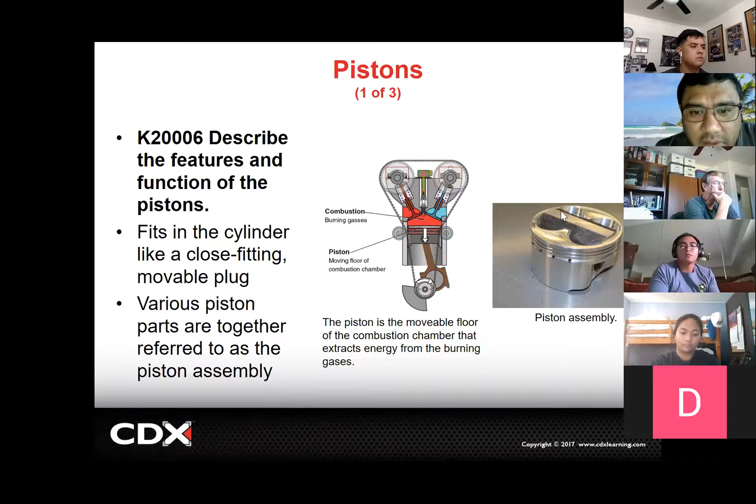So what's the next slide here? I think it's coming up. Area of piston head shape in about 4 or 5 slides. It shows the different types of piston head shapes.

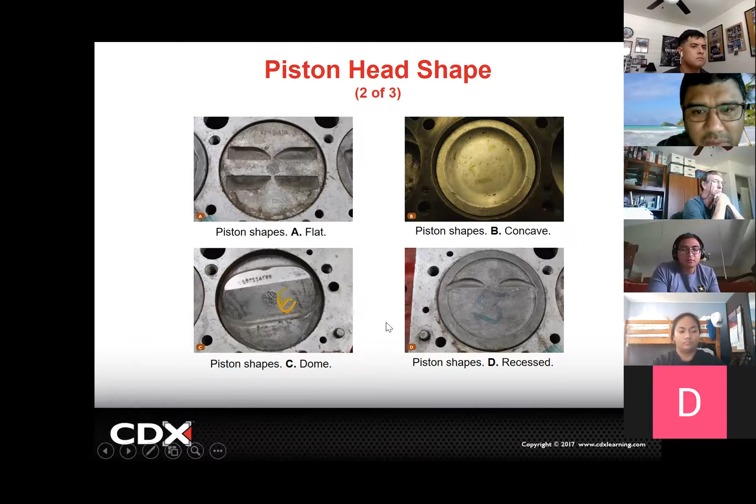The cam? The cam? The crankshaft? Crankshaft, yeah. There's 2 moving parts, those 2 rotating parts like that, the crankshaft and the camshaft. The crankshaft is responsible for holding the conrods, connects the conrod to the piston.

Do you guys have any questions? No.

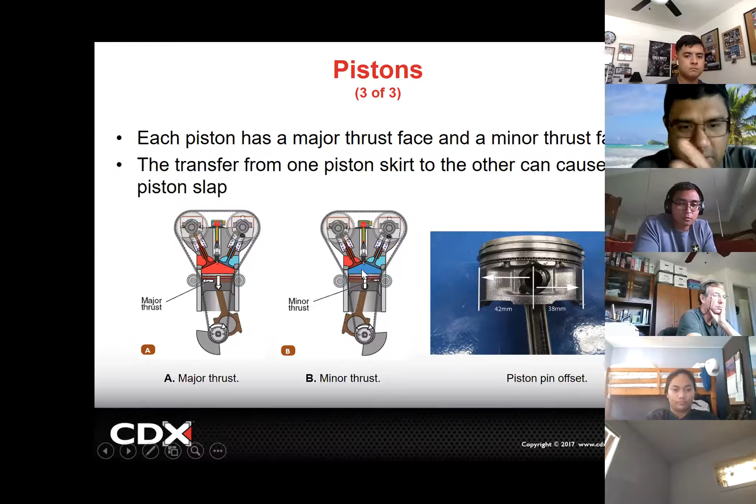Let me get to piston head shape. The piston head shape depends on the shape of the combustion chamber, and also on how far your valves travel out into the combustion chamber. For example, with a flat piston, the valves can only travel out so far, which limits its travel. A dome piston would also limit its travel. As some of you have seen in class, some piston tops are different and allow the valves to open up, or allow the combustion chamber to be smaller so the valves can open a bit further into the piston top.

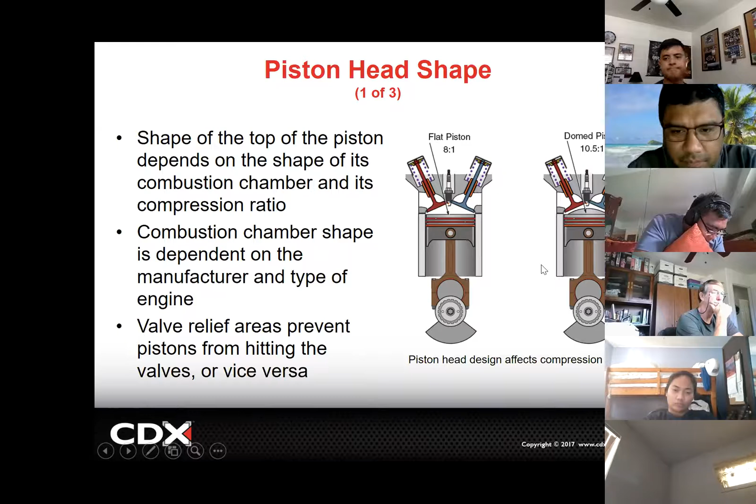The piston head design affects compression ratio. So we have our flat piston here, our concave piston - this is like a dish type. We have a dome type here, with actual added material on top to create a dome, and then we have a recessed piston, so our valves can actually come down into this type of piston, and this one too.

Forging and casting are used to manufacture pistons, and the two versions of the cast piston are cast aluminum with steel struts, or cast aluminum with 16 to 19% silicon, called the hypereutectic piston - that's what we were talking about at the beginning of class. Hypereutectic pistons are stronger than pure aluminum pistons and are used in many applications.

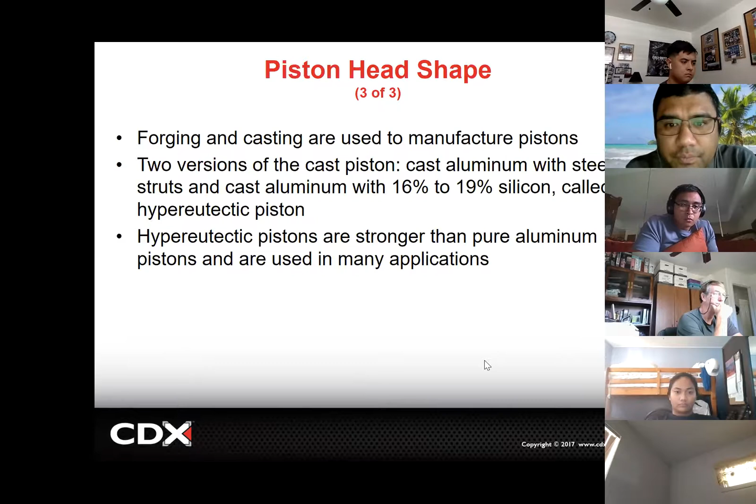I don't know, I guess it depends on how you treat the engine. If you never change the oil, or don't maintain it very well, I guess it would wear off quicker. But we've worked on engines that had 100,000 miles and they still had that coating on it.

What time is it? 12:13. Okay, let me get through a couple more slides and I'll let you guys go.

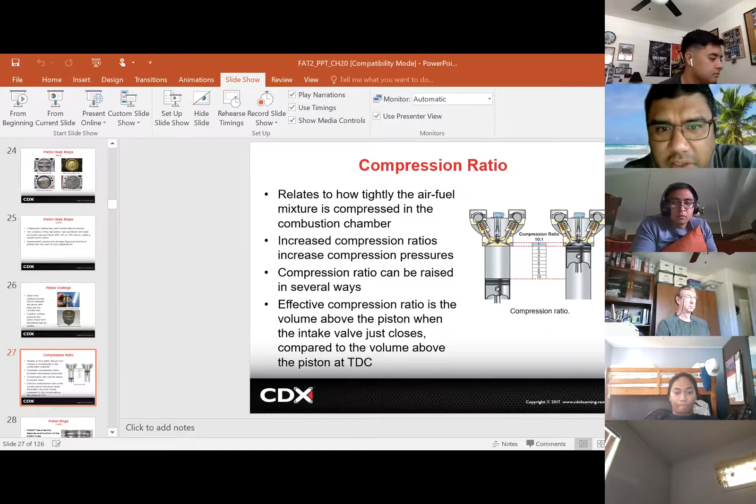Compression ratio relates to how tightly the air-fuel mixture is compressed in the combustion chamber. If you look at this picture, it's like 1 of the 10 parts of the cylinder as the piston comes up to top dead center. An increased compression ratio can increase compression pressures, and we can get more power from that expansion because we're squeezing the air and fuel molecules into a smaller space. When they explode, we get more power out of that combustion chamber.

Compression ratio can be raised in several ways. Effective compression ratio is the... let's talk about the ways it can be raised. How can we do that, guys?

We can raise the compression ratio on purpose or not on purpose. Let's talk about some ways we can raise it on purpose. A domed piston crown - sure, a domed piston. We're adding more material into our combustion chamber, which shrinks down the combustion chamber size, right?

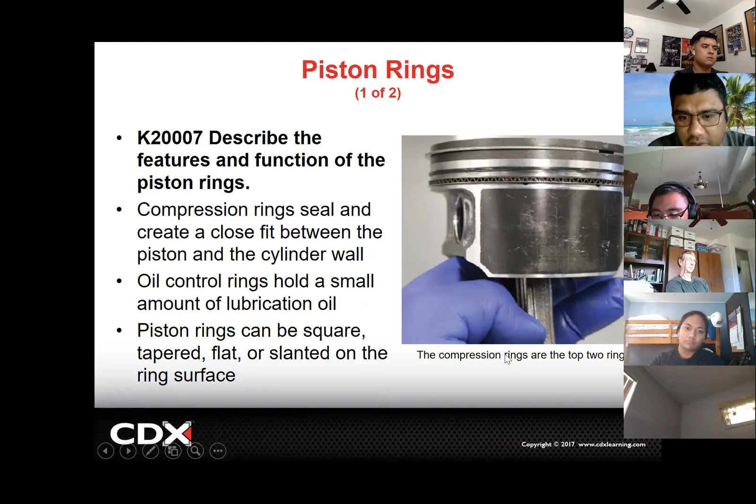The piston rings can be square, tapered, flat, or slanted on the ring surface. And it says here too, the compression rings are the 2 top rings. The piston rings ride in ring grooves in the piston. Most common arrangement has 2 thin compression ring grooves and 1 oil ring groove.

So when we take this apart, we have special tools for cleaning these ring grooves out because carbon tends to build up inside of the ring groove. You don't really want to stick a screwdriver in here and mess this up or break it. So we have a special tool that actually clamps the piston inside of it, and you rotate the piston inside here on the groove to scrape out any built-up carbon if you were reusing that piston.

And then the ring lands support the piston. So it's kind of like—what component can you guys think of that we looked at that was similar to this, inside of the automatic transmission? It also used lands and grooves, and valves.

You guys remember the spool valve? Yes, the spool valve used some similar terms to the lands and grooves. Good job, JT. It was the spool valve.